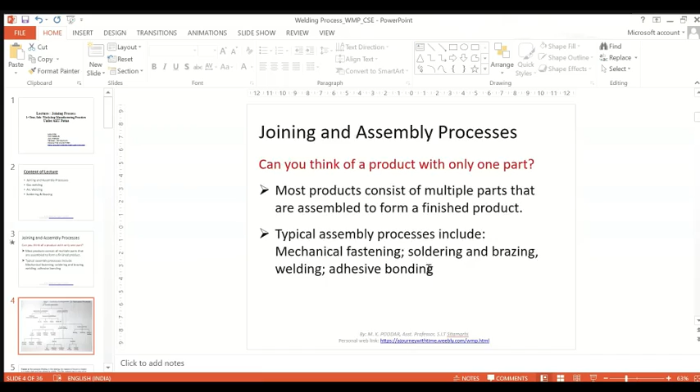Now, first we classify the joining process. We can classify the joining process first in a broad sense. One is mechanical bonding type, and second is atomic level bonding type. In mechanical bonding, it may be permanent, or it may be temporary or semi-permanent. Temporary, like when we use a screw, nut, bolt, key, these are temporary mechanical fastening processes. When we use rivet, stitches, staple, shrink fit, these are permanent joining processes. So through mechanical bonding, we can join different components either temporarily or permanently.

Second is atomic bonding type. It can be divided into three categories. One is solid state bonding, second one is liquid state bonding, and third one is liquid solid state bonding. In solid state bonding, examples are cold welding process, friction welding process, diffusion welding process, and hot and forge welding process.

Liquid state bonding is also called fusion welding process, where we need a molten pool of liquid at the interface to join different components. If you want to join, you have to use a heat source to develop a molten pool at the interface. After solidification, it can join the two components. Again, it can be of two natures. One is electrical type, another is chemical type. Under electrical type, all arc welding processes are electrical type fusion welding processes. Other examples of electrical type are induction welding process and resistance welding process.

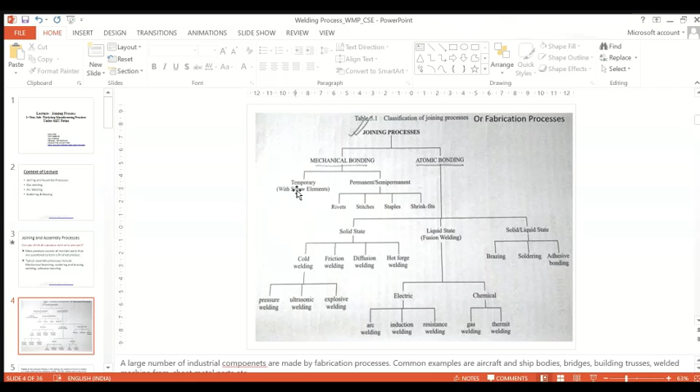Now we can understand the different types of joining process, like mechanical fastening, with examples. Basically, mechanical fastening uses physical force to hold the parts together. For this purpose, it uses mechanical fasteners or part design like screw, bolt, nails, rivet, cotter, clip. These mechanical fasteners are used to join and assemble different components. This figure shows a nut bolt, a key, a nail.

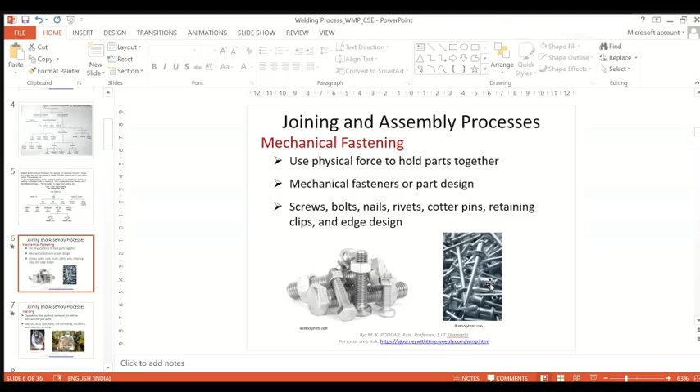Another is the welding process. In this process, it uses heat, pressure, or both to join the parts permanently. Examples shown: gas welding, arc welding, stud welding, spot welding, forge welding, resistance welding, induction welding. These are examples of welding process. It may be fusion welding like gas welding, arc welding, induction welding. These are pictorial diagrams showing a man doing different welding processes.

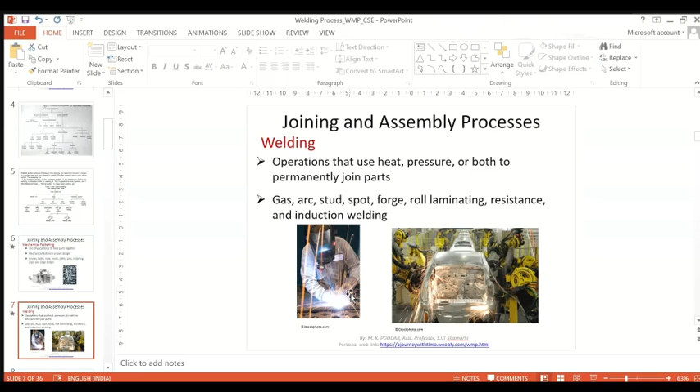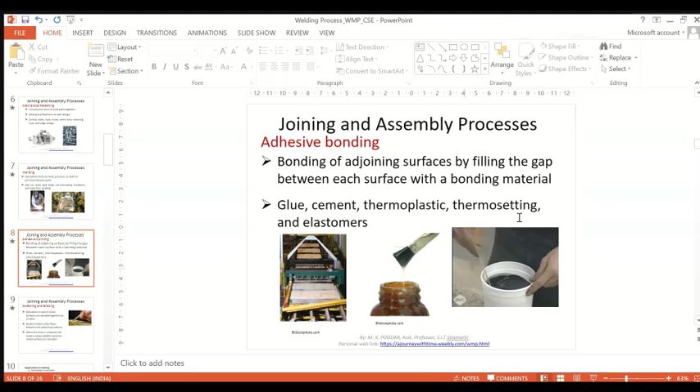Another joining process is adhesive bonding. In this process, adjoining surfaces are bonded by filling the gap between each surface with a bonding material. For adhesive bonding we use glue, cement, thermoplastic, thermosetting, and different elastomers to join different materials and components. Like for plastic components, we now use Fevikwik glue to join them very easily. So this is the adhesive bonding process.

Another very important one is soldering and brazing. It is an operation in which metal surfaces are bonded together by an alloy. The heated molten alloy flows between the adjoining surfaces. After that, heat is removed, so the molten metal solidifies and the metal surfaces get bonded. Even on a motherboard, different types of resistors and components can be joined by using the soldering process, soldering and brazing processes.

Now, applications of welding. The welding process has a wide range of applications. In automobile construction, railroad equipment, ship and aircraft construction, even building construction, we use different types of welding process. You may have seen they use gas welding, they use arc welding.